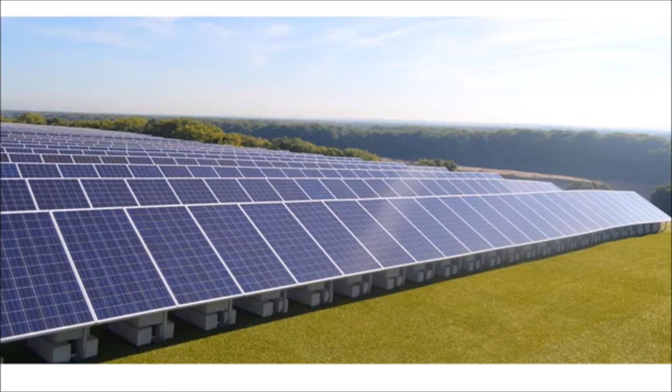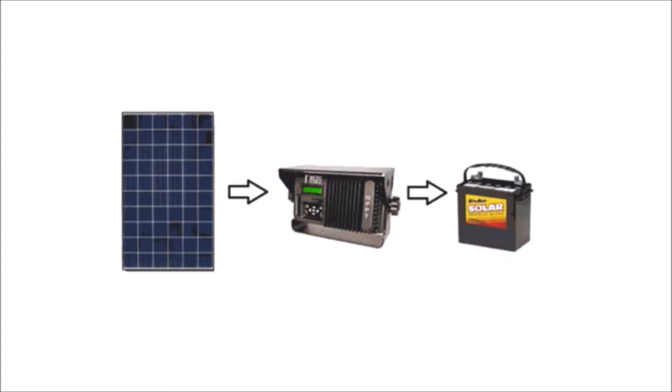First, we have the solar panels absorbing the sunlight as the source of energy. The solar energy goes through a charge controller. The charge controller manages the input energy into the desired amount before being stored in a battery.

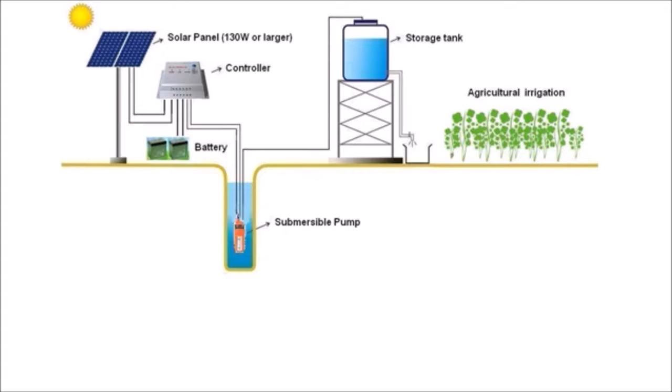The battery powers up a motor to run the submersible pump. Groundwater is pumped out and travels to a reservoir and then to a series of pipes leading to the irrigation fields before finally sprinkling out and watering the field.

A simple, low-cost, green process.

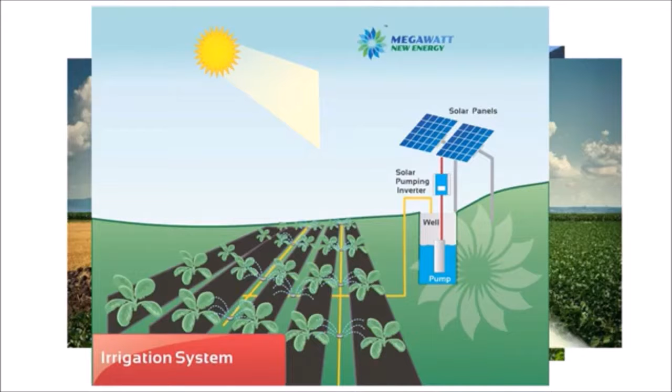Farmers have always played a significant role in our society as they provide the world's population with food. However, one may forget that not only do they provide food, but they also provide energy, which nowadays is of paramount importance, especially in light of renewable energies. Indeed, farmers can produce energy from the wind, the sun, or biomass, and they can use it for their own farm. Solar energy might be one of the easiest ways for farmers to produce energy.

Most farmers usually have several large buildings whose roofs are directly under the sun without being hindered by the shadows of trees, turning them into an ideal place to settle a photovoltaic system.

One of the areas in agriculture that benefits most from solar energy is irrigation, especially in arid regions. The pumps used for the transport of water are equipped with solar cells. The solar energy absorbed by the cells is converted into electrical energy via a generator, which feeds an electrical motor driving the pump. Most traditional pump systems mainly work with a diesel engine or a local power grid.

Diesel pumps are slightly more efficient than AC-powered pumps as they allow greater flexibility, but add to a greater environmental impact. One of the main constraints is that this system relies on fuel availability. Diesel-driven pumps are cheaper than solar-powered pumps, but operating costs are quite high and depend heavily on the diesel price. Solar pumps are useful where grid electricity is unavailable and alternative sources, particularly wind, do not provide sufficient energy.

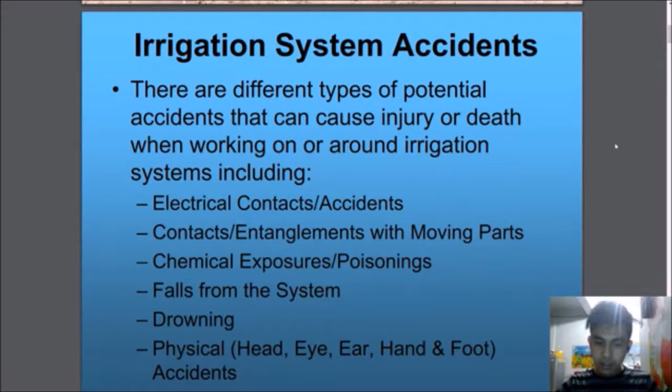I will now explain the safety around irrigation systems. There are different types of potential accidents that can cause injury or death when working on or around irrigation systems. This includes electrical contacts, entanglements with moving parts, chemical exposures or poisonings, falls from the system, drowning, and physical injuries including head, eye, ear, hand, and foot accidents.

First would be the irrigation hazard of electrical contacts. Electrical safety concerns related to irrigation systems are important because pumps and other equipment operating in a wet or damp environment increase the chance of equipment failure if parts become wet. Personnel working around this equipment are often wet or damp, so their susceptibility to electric shock is greater. Many of these systems may not have had proper maintenance performed on them over the years.

This also includes faulty equipment and wiring, installation and maintenance issues, unsafe work practices, failure to turn off power before working on systems, overhead power lines, irrigation pipes standing near systems, spraying water on overhead lines, and lastly, lightning. So what is the electrical safety goal?

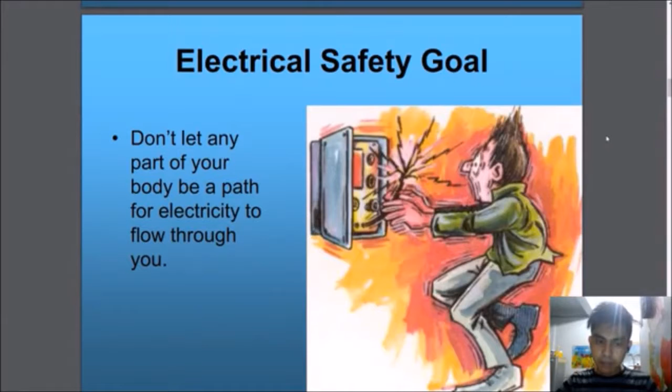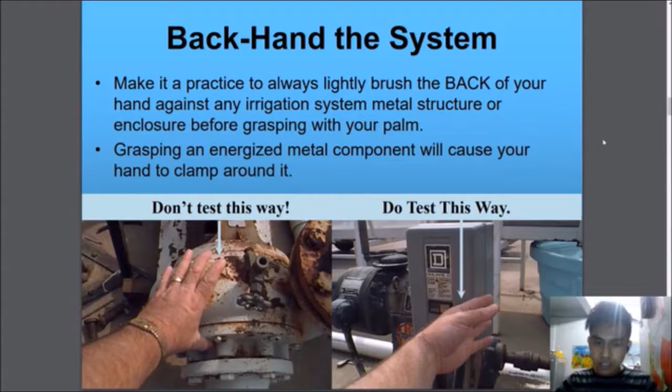Don't let any part of your body be a path for electricity to flow through you. How can we avoid this? By using the backhand system. Make it a practice to always lightly brush the back of your hand against any irrigation system, metal structure, or enclosure before grasping with your palm. Grasping an energized metal component will cause your hand to clamp around it.

From the illustration, the proper way would be the right side, as you can see. First, he would touch the electric box using the back of his hand to check if there's any electrical shock or fuse that can harm you. If there's nothing, then you can easily clamp or close it using your hands.

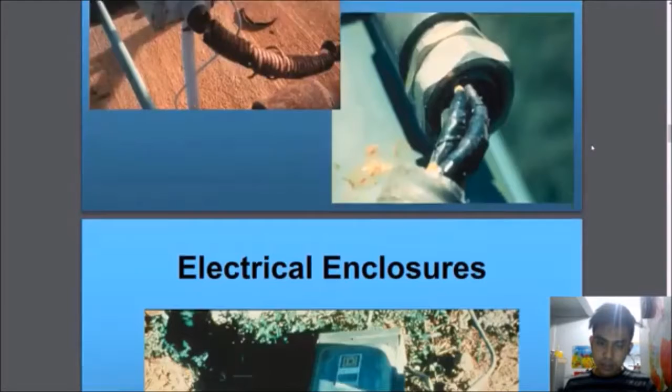The following hazards also include broken, separated, or corroded electrical conduit and electrical enclosures. Note that openings are unsealed and it is not installed at the required height or mounted to a permanent structure. These are the following equipment and installation problems.

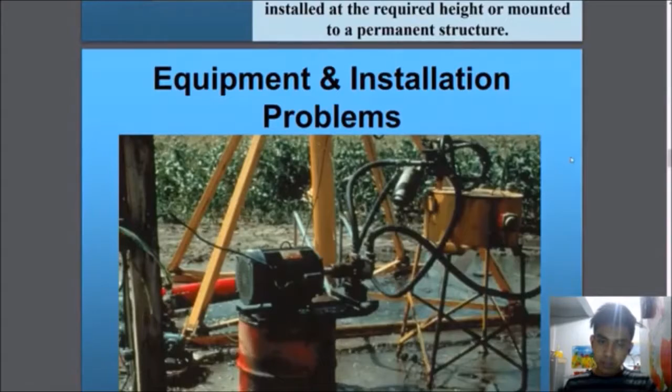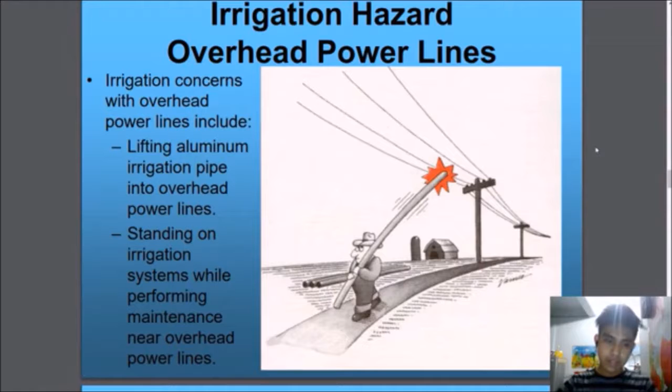Irrigation hazard: overhead power lines. Concerns with overhead power lines include lifting aluminum irrigation pipe into overhead power lines, and standing on irrigation systems while performing maintenance near overhead power lines.

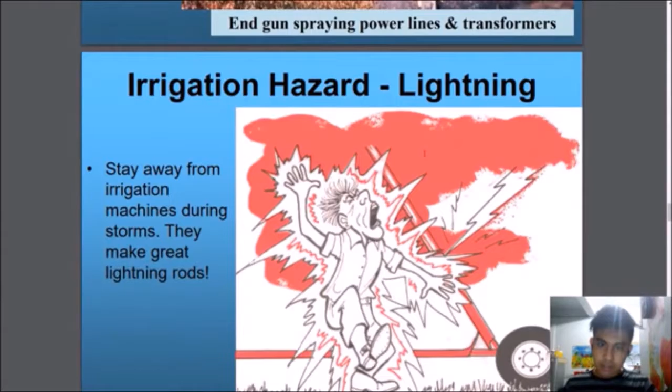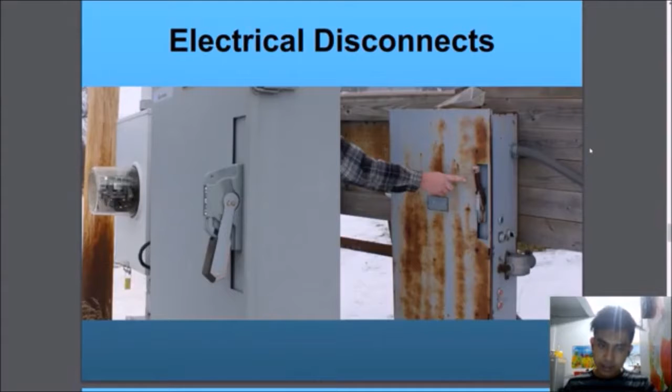Next would be the irrigation hazard of lightning. Stay away from irrigation machines during storms; they can make great lightning rods. These are examples of electrical disconnects and irrigation machine disconnects.

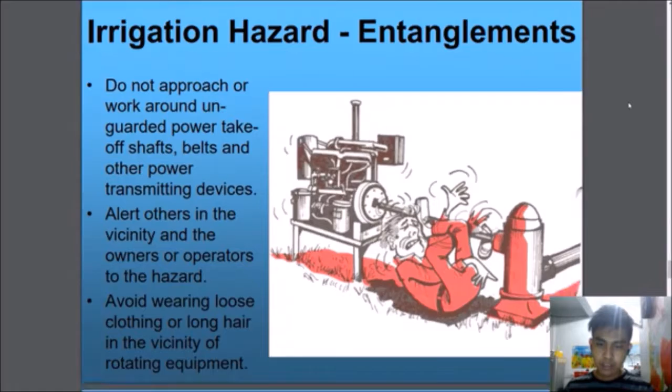Irrigation hazard: entanglements. Do not approach or work around unguarded power take-off shafts, belts, and other power transmitting devices. Alert others in the vicinity, and owners or operators, to the hazard. Avoid wearing loose clothing or long hair near rotating equipment. Be alert to unguarded power take-off shafts, belts, and other power transmitting devices. Replacement and retrofit guards are available from dealers for older machines.

Based on the picture, this is an example of an unguarded drive shaft and unguarded belts or pulley. These are also examples of the irrigation hazard of entanglements.

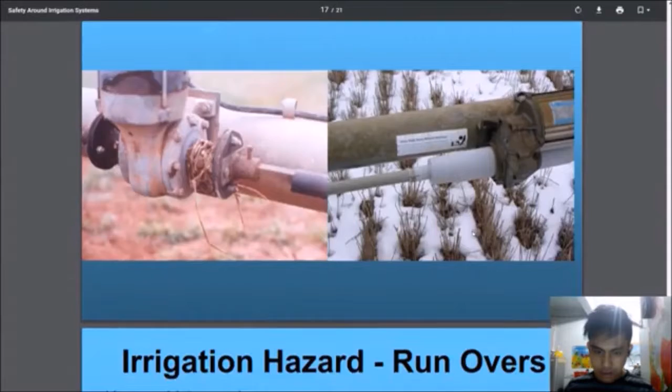Next would be irrigation hazard: runovers. Keep vehicles and other equipment off the path of self-propelled machines. Many of these machines have excellent traction and can climb over and crush fairly large objects like cars, pickups, and even small buildings due to their weight.

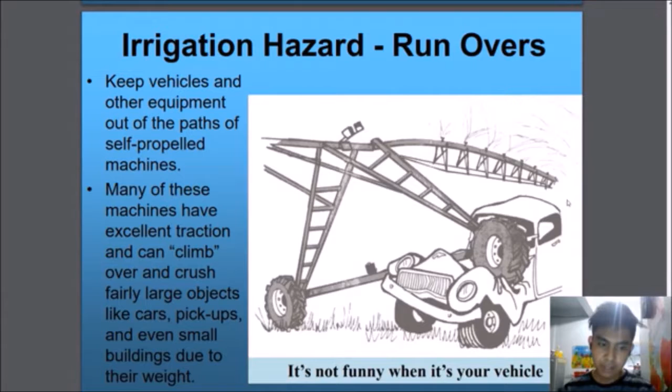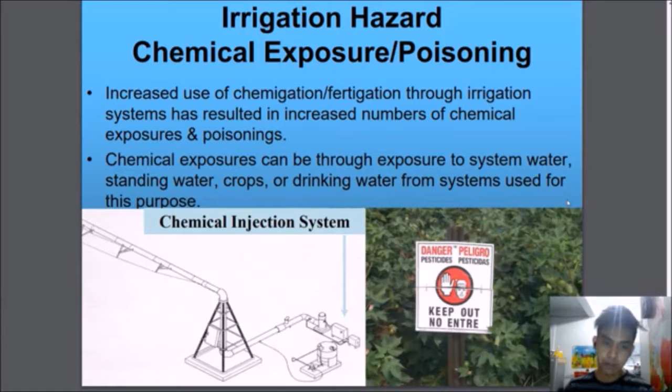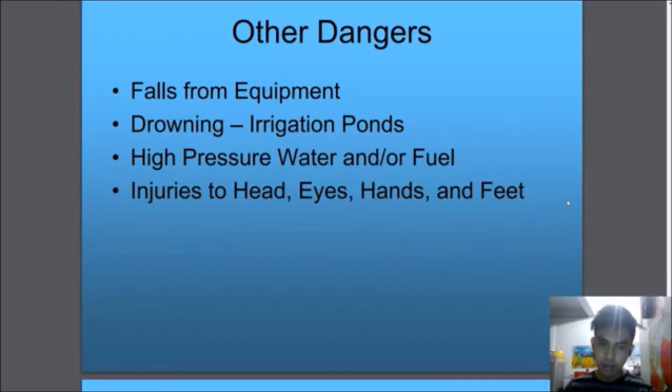Other dangers that can be included in this irrigation system are falls from equipment, drowning, irrigation ponds, high pressure water and/or fuel, and injuries to hands and eyes, as I said earlier. The precautionary measures are using gloves, hard hat, earplugs, safety glasses, proper clothing, and biosecurity. And that's all, thank you.